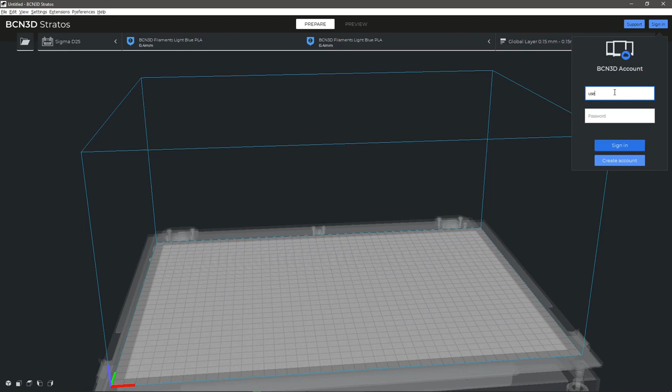If you would like to make use of the BCN3D Cloud as well, you can sign in with your account on the top of the page. Type your username and password and click on the Sign In button.

To add a 3D printer already registered in the BCN3D Cloud, click on Add the Printer and open the list of network printers. Select your printer's serial number and add it to your list of 3D printers. You can see that the name of the printer has changed and it is now added to your network.

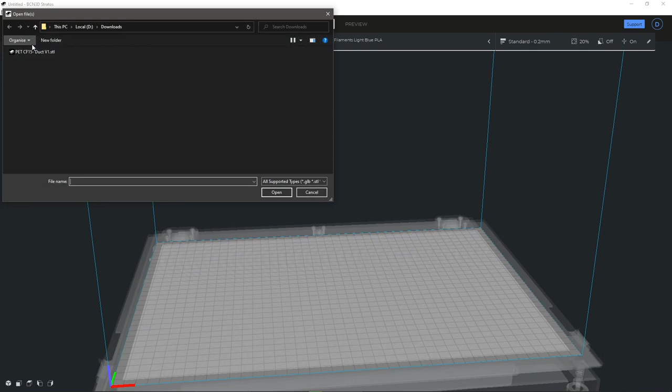In order to load your first print, open the File folder and select the 3D model you would like to print. The model appears on the printing surface. With the tools located on the left, you can move the part as you wish freely along any axis. You can also scale your model and input an exact scale percentage.

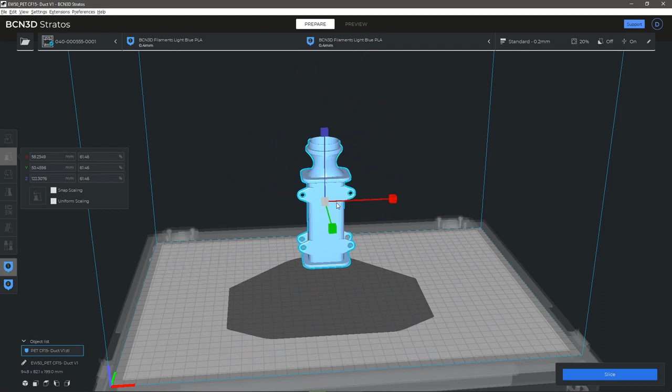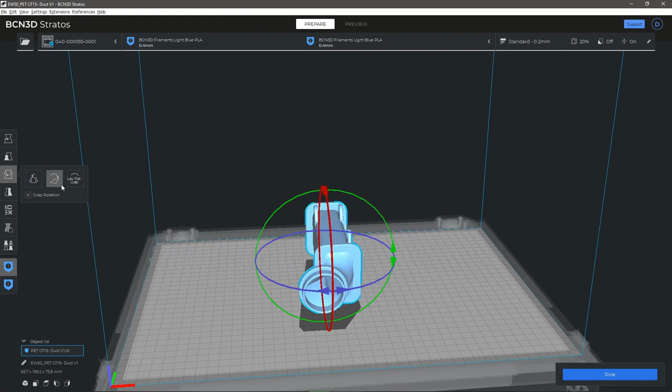The rotation tool comes in handy when positioning various models. With the lay flat function, the program automatically rotates the part towards the closest, flattest surface, and with the new Select Face to Align function, you can pick which face will be in contact with the build plate. You can mirror the models using the Mirror tool.

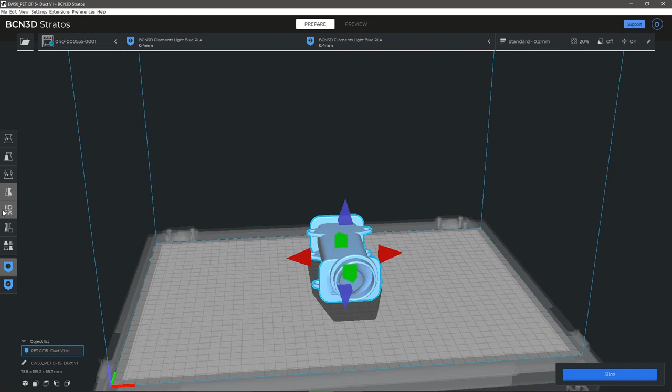The different printing modes allow you to get the best out of our IDEX system. Printing the same part with one or both heads, or printing multiple parts with both heads at the same time. If you would like to make identical copies of the same model, select the duplication mode. Mirror mode will make a mirrored copy of your model.

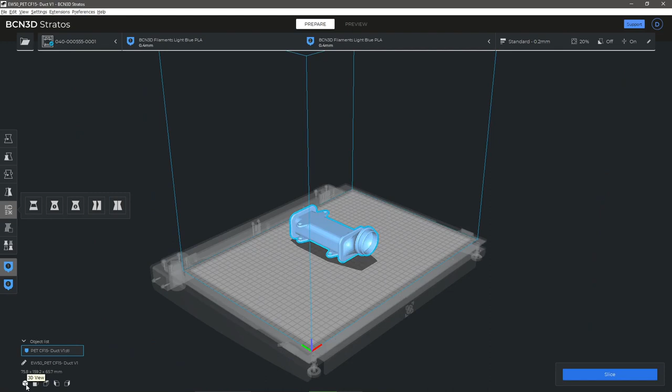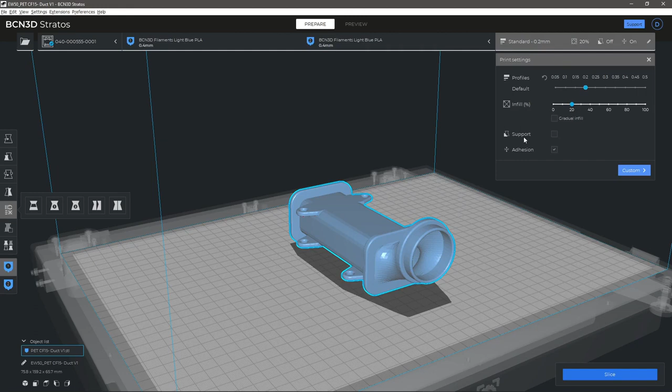On the bottom left, you can change between different print surface views and alter the viewpoint by dragging with the right mouse button pressed. On the top, you can also see a summary of the two extruders and the material setup, and important parameters like layer height, infill percentage, support, and build plate adhesion.

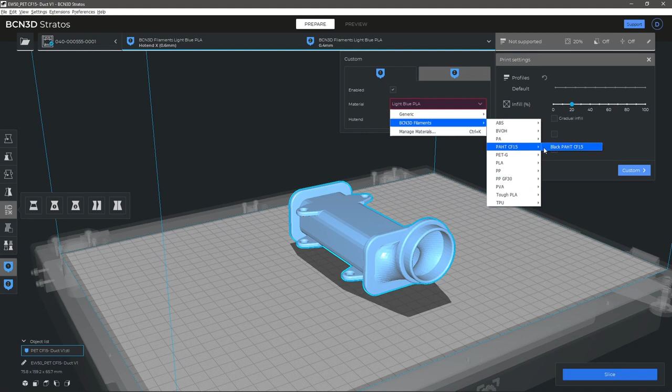On the Extruders tab, you can enable or disable each hot end and select the hot end size and material. The hot end size drop-down menu shows the hot ends compatible with your printer. The material drop-down menu shows a list of all the materials available, including all the materials by BCN3D. When changing to a new material, you will see that the indicated color changes, as well as the model loading.

If you select the model, you can alternate between the extruders and materials that you wish to print your project with, using the buttons on the bottom left. On the Profile tab, you can select a recommended printing profile in the same way, keeping in mind the layer height that you would like to print with. You can also determine the density of the part infill. The gradual infill function is only recommended for the support material.

If the printing model is more complex, you can enable support and select which extruder you'd like to use for this, and also enable build plate adhesion to be printed. Once you are finished with slicing the part, you can verify the support material with the Preview tab layer view.

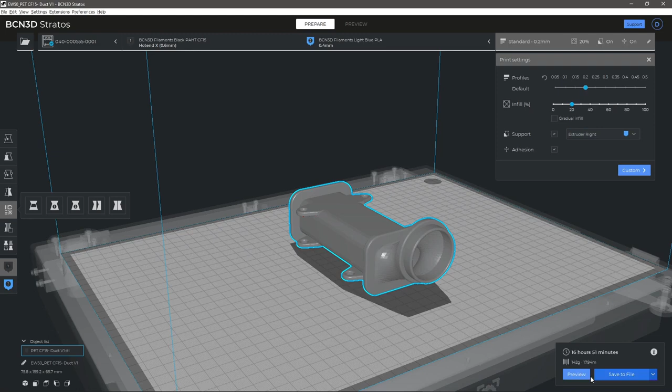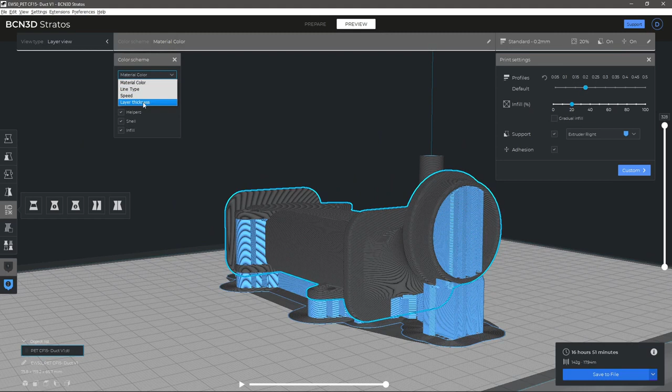You can also preview the line type, speed, and the layer thickness. You can also move between the different layers to review how the part will be printed in more detail. You can click play to see a short animation of the route the nozzle will follow.

Apart from printing a model with support material, you can also make use of the IDEX system to produce a multi-material model, combining two different materials in one part. In order to do this, open the models. The models would already need to be separated and exported individually in your design software.

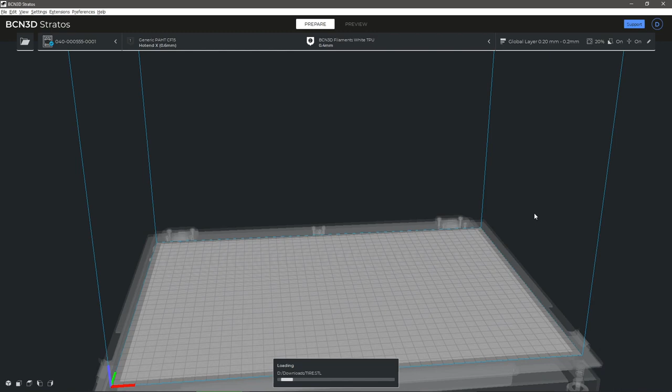Select which material you would like to use with which extruder, but keep in mind that not all materials are compatible with others. In the description, you can find a table about material compatibility. Once the materials are selected, choose the material you'd like to print on each part.

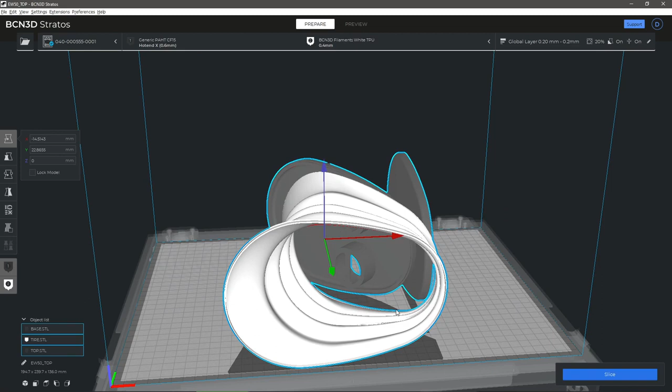Then, select models while holding the Shift key and right-click on them. Choose the Merge function and both models will be united in one model. If the two parts don't merge properly, verify the assigned coordinates in the exported models from the design software. You can now slice your model and verify the parts have merged correctly.

Lastly, to print your 3D model, you can send the files directly to the connected printer or save it on your computer or the printer's SD card.